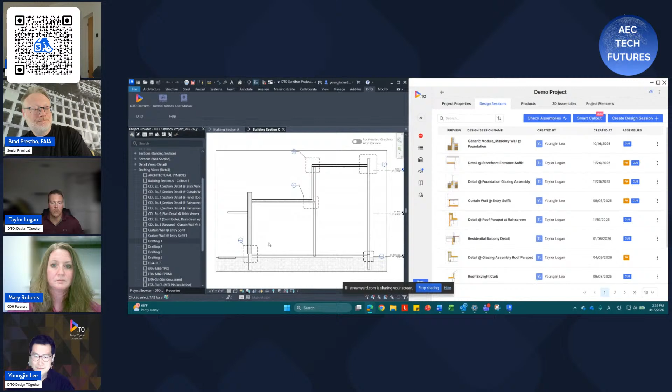Instead of doing a stereotypical software demonstration, we figured we'd show a workflow analysis, a new one we've started to consult on across the country. We call it designing forward. This is the process of, as you're working on projects, contributing back to your firm's overall knowledge repository in a meaningful way.

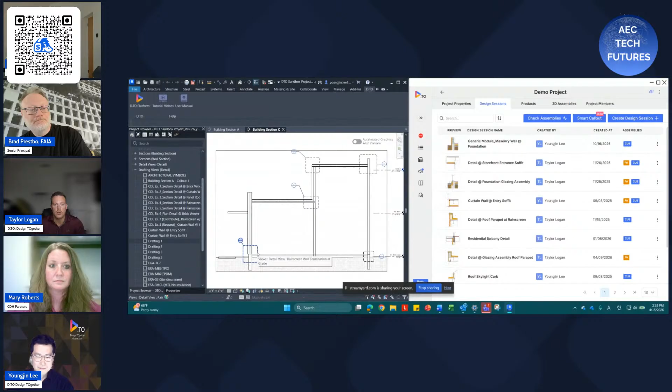We'll show two different roles and how they'd interact with the DTO platform. Starting with this first one would be someone like Youngjin, a 20-plus year architect. Maybe he's been at this firm for about 6 months, but he has a whole bunch of background knowledge and expertise in a specific type of project.

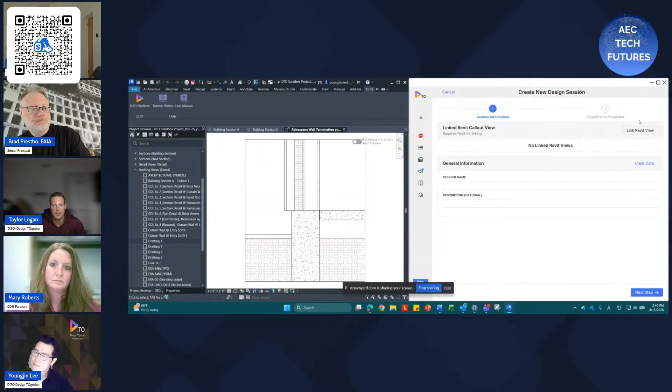So he's in the process of his detailing workflow. Here he cuts into the callout view and he's ready to start detailing this. The first thing he's going to do within the DTO platform is create what's called the design session. Design session is basically DTO terminology for the toolbox to execute a detail.

The way our AI works throughout this is basically like a smart matchmaker, or if you think of Clippy from the Microsoft Word days - looks like you're working on a resume, here's a format. Same basic concept, but for foundational building concepts.

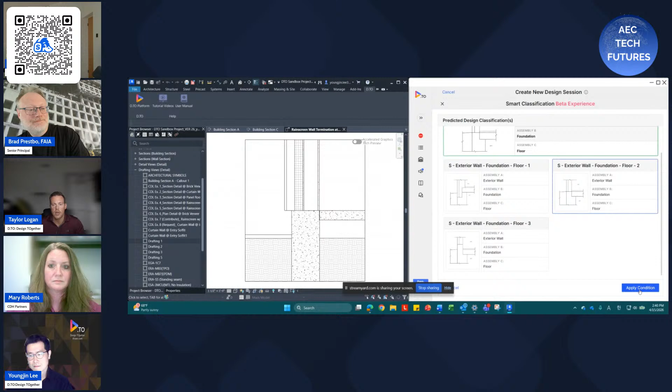You'll see here the AI is making a recommendation based on what Youngjin has actually modeled within Revit. It's making recommendations based on the geometry, some of the naming, and some of the 3D elements in that model - this is the type of condition it thinks you're working on, with the ultimate goal of providing that design session, the design toolkit to execute this detail. It's making a recommendation based on the actual assemblies within here, reading into the model and making suggestions.

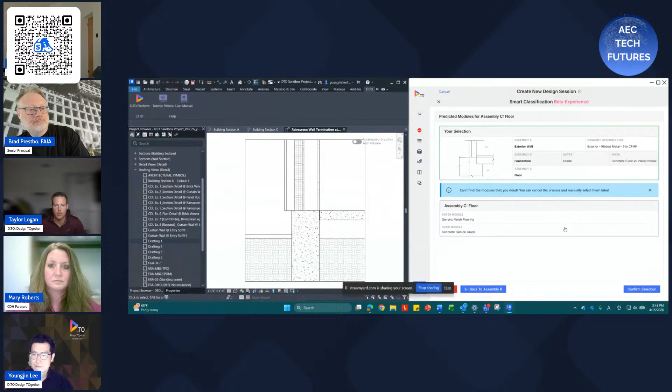It's really cool when you get past this initial recommendation piece, because we are very human-centric. We were founded by architects, so there's no desire for the AI to ever take over. We definitely want to stick to our word on providing agency to the architects. At this point, the human can make any changes based off the recommendations, because they ultimately know what they know. And in this context, Youngjin's a 20+ year architect.

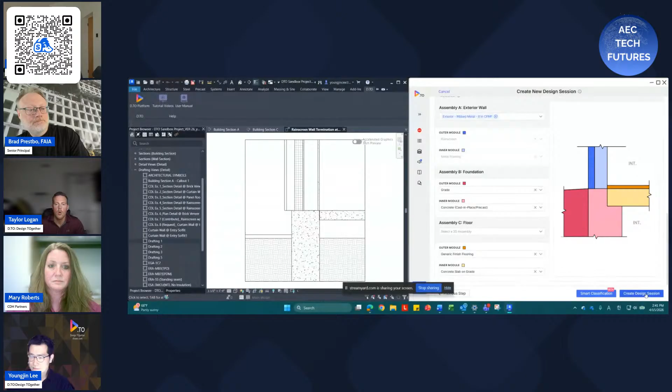From here, we're going to go into the actual design session to show what it's like to actually deliver information in a contextual way while you're doing the work. This is what we had alluded to earlier, the difference between having information all over the place, like going through a fire hose at you.

So this is where we can actually dive in and get context-specific information. In that way, we can use that as powerful knowledge going forward and deploy it into the 'how' we're actually going through and detailing out this process. And then from a pure workflow standpoint, since Youngjin in this instance is a 20+ year architect, I just want to get into the efficiency of how do I actually implement this knowledge in a meaningful way.

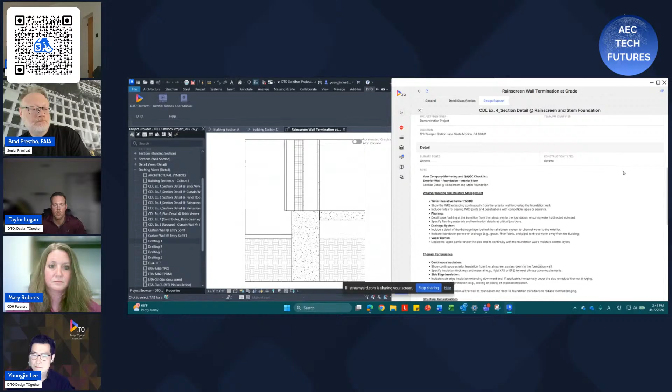And I'm going to go and review what the firm has for me. This sometimes can be a QA/QC checklist. It can be lessons learned. This is where we're really distilling down and scaling that knowledge that the rest of the firm has, and making it accessible via the context of what I'm actually designing.

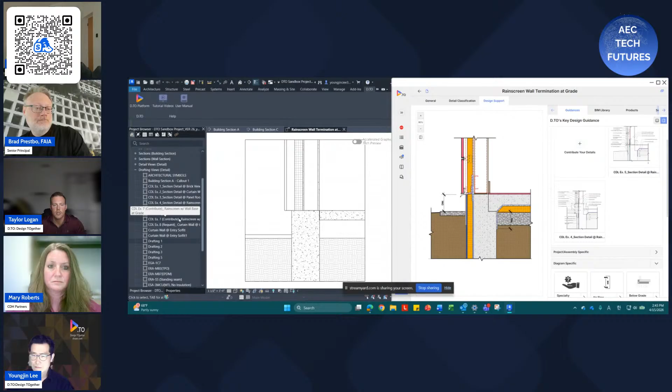And for this example, since we're highlighting the design-forward workflow, this is a scenario in which, because of Youngjin's expertise, he would look at this as maybe a 50 to 60% of the way there detail, versus from his experience, he actually has much more of an 80 to 90% of the way there version that he wants to recommend to the content manager, the BIM manager, the project architect, saying, hey, I have a more preferred or better way to do this based on my experience.

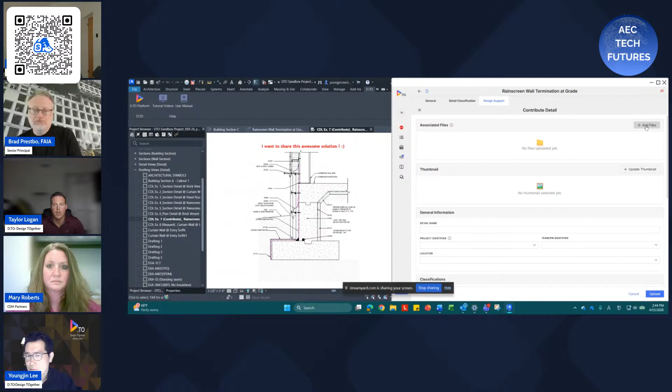And so in keeping this all context specific, D.TO has this button here called the contribute button. This is actually where, without a lot of technology knowledge but all the technical knowledge, Youngjin can quickly click and the DTO platform will read everything that's going on in that detail view. It's going to pull that in basically as a suggestion to what you could think of as your Reddit moderator, but your content manager within your firm, who oversees what knowledge is meant to be disseminated to everyone across the board.

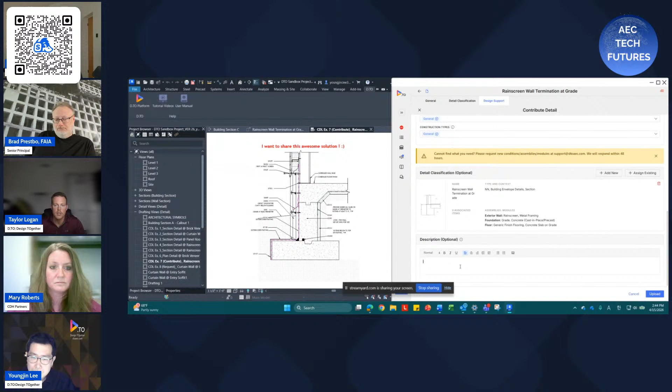And so at this point, the D.TO platform picked up on all those individual BIM components. It picked up on the lines, it even picked up on his text note up top where he recommended this awesome solution. And then he's also able to distill down, via this rich text editor tied to this context-specific detail, all of the additional recommendations that he wants the firm to incorporate.

So now, only being at the firm 6 months, within a matter of minutes, he's contributed something that he learned the hard way through bumps and bruises over 10, 20 years, to the firm, for them to be able to take that distilled knowledge and scale that across to the rest.

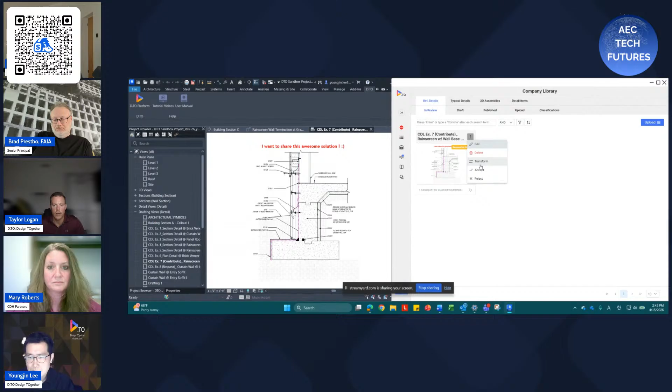And so now on the back end, this is the point where the content manager would be able to move that into their QA/QC process live. So they would have received that while he's working on his project. He goes on to the next thing, and he gets to feel good, kind of a bit of gamification in there, contributing to the overall library.

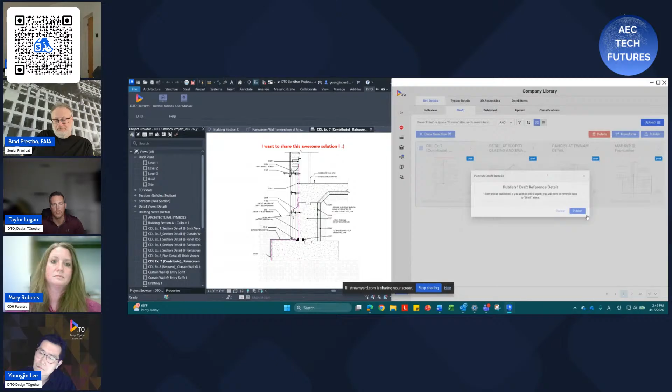But then from a bigger picture standpoint, now that knowledge is accessible across the firm, across the offices. So to Mary's example earlier, the worship team's knowledge has made it across to, I believe it was the healthcare team, on the metal sloped roof, live and in action while working, instead of what most firms right now do, where they're having quarterly update meetings, putting this on a board and trying to go back and put it in, just very much out of context.

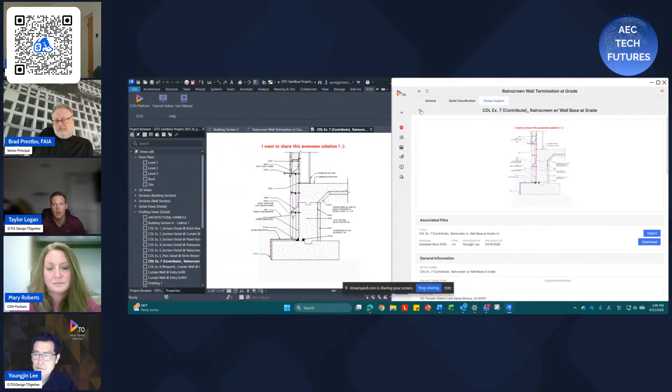And now kind of the other side of this coin is I actually want to shift Youngjin's persona here to be much more of, say, a junior architect, or maybe I'm 5 years in and I'm actually very familiar with our workflow processes and our tools and whatnot. And so I'm going to go into the detailing process. I'm going to jump into a call out view on a different one.

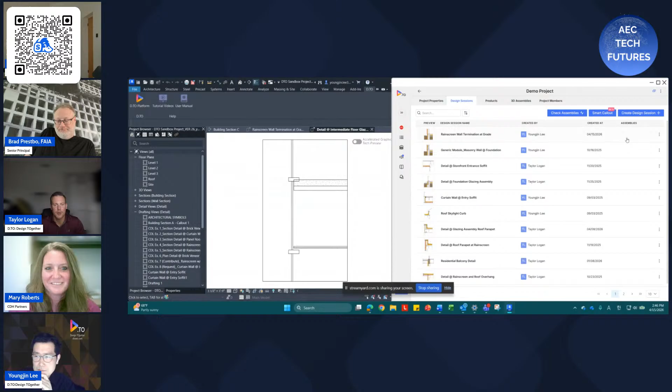And I know, since I was onboarded relatively recently, the proper way that Mary would have told me to go through and actually access the firm's vetted information. I'm going to go and create a design session the same exact way. I'm going to link to that current view, and then I'm going to run the AI smart callout to basically bring forward Clippy: hey, what does the firm have to recommend tied to this information?

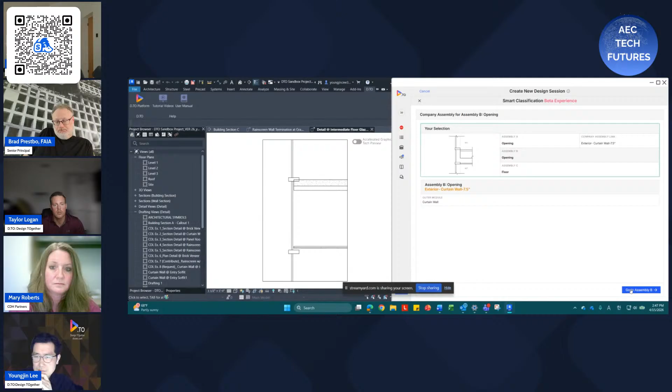In the background, the way projects are managed within DTO, the AI is already notified in project setup of what the climate zone is, the construction, the occupancy type, all of the relevant project information. So it's only providing relevant content in context for this.

We don't have a detail for this condition. What do I do? Typically right now, this would be either a situation of panic, or I'm going down the Google rabbit hole, or maybe running around to offices trying to yank on the coattails of a senior architect saying, what next, what next, what next? Or in an ever-evolving workforce where people are all over the place, like Brad mentioned earlier, I might just be left out in the dust, and I might be tempted to just copy and paste.

I know that there was this thing from this past project, but utilizing this design-forward workflow, I can actually, within the DTO platform tied to all of this context, hit that same contribute button—we're updating the text where it also says request information—and go through that same process.

What's really cool here—Youngjin, please pause when it gets right here—is when I'm actually looking at a 3D view like this, it's going to ask me, hey, do you want to compress this 3D information down into a 2D referenceable material? It's basically going to convert this into a drafting view.

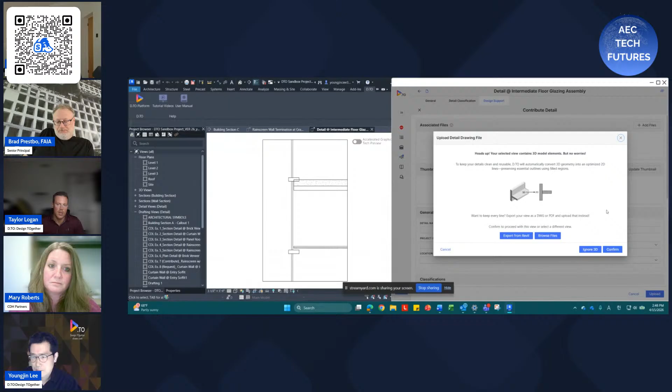So then my content manager can get this to the right person to provide a relevant drafting view to help me. We call this Smart Translate, but it's kind of an invisible AI working in the background. Youngjin, if you can, go ahead and give that the okay.

It's going to go ahead and capture everything going on in that view, so it's all context specific. Again, it has the project information, and now it even has some of that 3D information compressed down into a 2D relation, so then I can actually request help on this detail.

At this point too, I can add in an additional PDF if I have something, or even—a unique part of this workflow we're starting to see usage of—a contractor can actually upload a real construction photo via this same feature set into here.

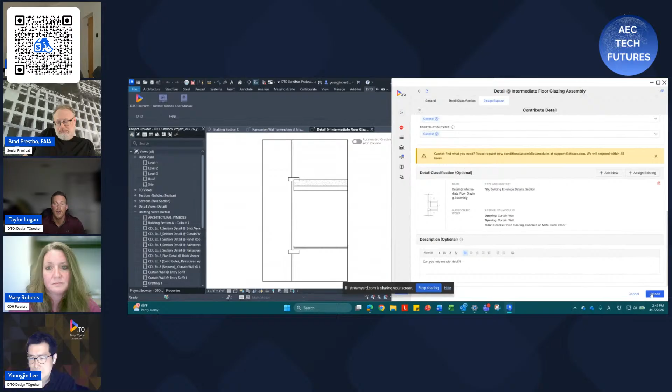But for this instance, I'm asking for help. Hey, there is no detail library, or hey, I have something that's 50% of the way there—can you please provide feedback? And I'm going to go ahead and submit that request.

I'm able to see via the review tab where my request is sitting, but at the same point, this goes live to my content manager, so they can go in, look at this, and be like, okay, we either don't have a detail that fits this condition, or maybe we need to upload one from a past project, or maybe we need to put a senior architect on detailing out this condition.

So it's a way of basically sharing the time of those senior architects without having to actively take their time. Instead of sitting down and spending hours doing this detail, holding the person's hand, they can go ahead and knock this out on their own.

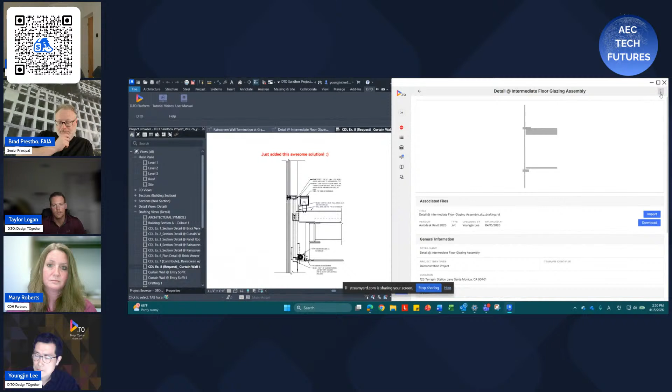They can use that same functionality to upload this detail back in and basically override the request on that information, updating it to where, hey, here's now a great detailed solution.

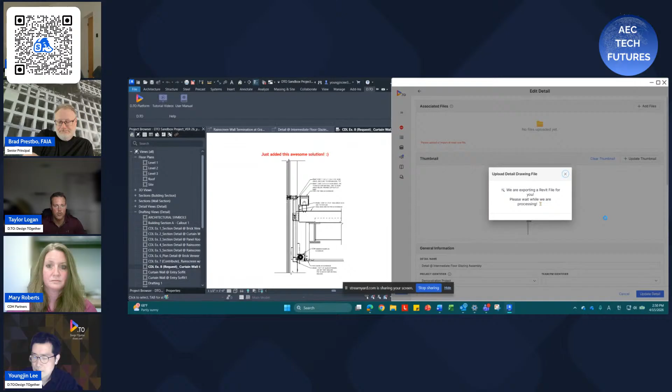Then they have the option to put this fully through a QA/QC process, or if this is a person who has the authority to update depending on user permissions, they can capture all of that componentized information, all of the text notes or keynotes that are in there, as well as—Youngjin put that nice little red note up at the top, that's kind of his signature.

And what's great about this process is you can further filter it—highlighted by project, by office, or even by the person who submitted and put this information in the library.

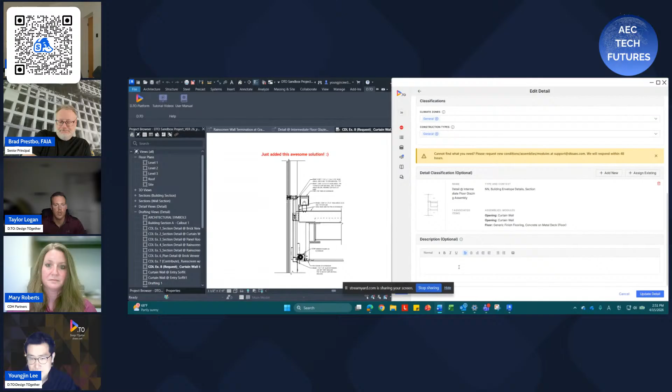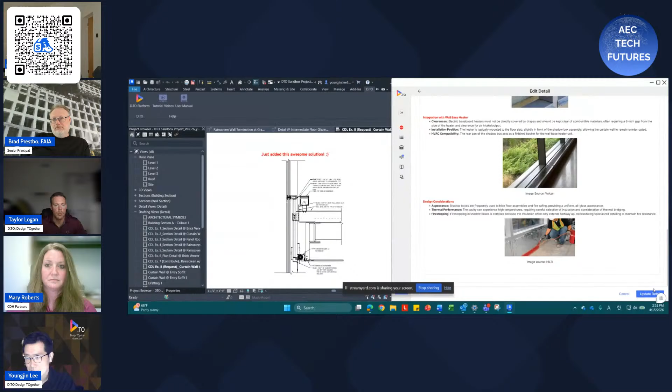And then you can see right there where it says general for climate zone and construction type. You can actually say, hey, this is only applicable to these climate zones, don't use it anywhere else. What's great is that makes it invisible when your average member is using the platform in other climate zones. So it's a great way to actively embed that knowledge for the AI to make useful, context-specific recommendations.

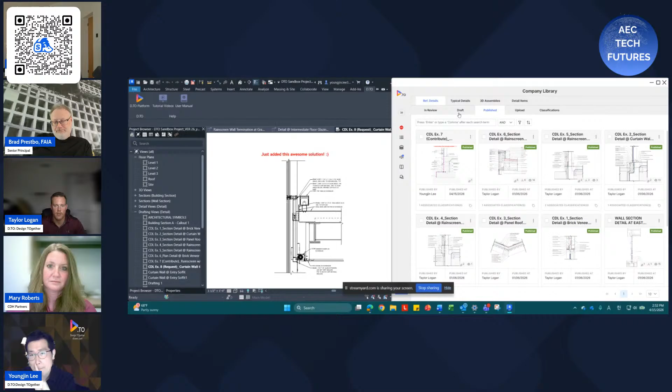And all of this is happening live, so multiple people can be working on it at any given point. Now, as that junior architect, I submitted that, left work for the day, had some coffee with friends. I come back the next morning, and Mary, being an effective BIM manager, made sure it was updated. I open my design session, and we click the view fetcher. I want to show this, it's one of my favorites. Let me publish this one first.

So this is basically Mary went in and fixed it and pushed that out, ready to go. And now this is me back as the junior. I'm back the next day, I open up my design session in DTO. I can use DTO to take me to where in my Revit model I was referencing this. And now when I go to populate, I wonder if Mary updated my detail. Let's check. Oh, great, look, now I have a detail.

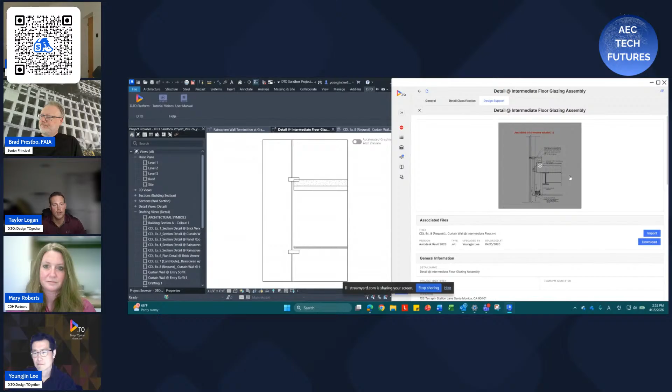Depending on how the workflow is structured, you can see how that was done in a matter of minutes. More stereotypically it's the next day or three days, depending on how efficacious your BIM manager review cycle is. But by bringing it all into one place and really empowering people to put the knowledge in at the time it's used, that's where I feel this workflow enhances information and turns it into knowledge.

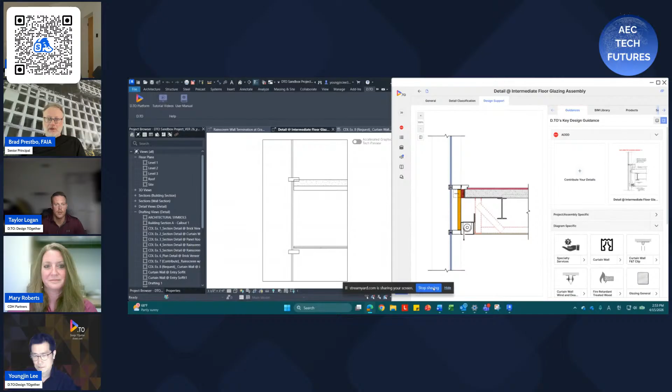Because it's deployable, it's workable, it's adaptable, it's something you're going to continuously improve over time. So not every single person has to learn things the hard way. Not everyone needs to trip and scrape their ankle to know don't run downhill full speed. Just learn from the other people that have already kind of done it.

And I think a broader approach from an individual basis will really scale out to a firm. And then ultimately, I'm a dreamer, but industry-wide too. So yeah, that wraps the piece there.

Youngjin, I know that's our newest workflow. Is there anything that I missed? No, you missed nothing. Thank you. Thank you for helping me.

But if you don't mind, I want to add one more thing here about the knowledge building moment. Not just a BIM tool or even the DTO tool, we use tools like ChatGPT or Gemini these days. And within DTO, we encourage our team members to use it internally too.

But the risk is there. The risk is when we accept that output too passively. That is aligned with Taylor's previous comment. Without critical thinking, reflection, or active engagement, we actually weaken our ability to think creatively and solve a problem thoughtfully, and to learn through this process.